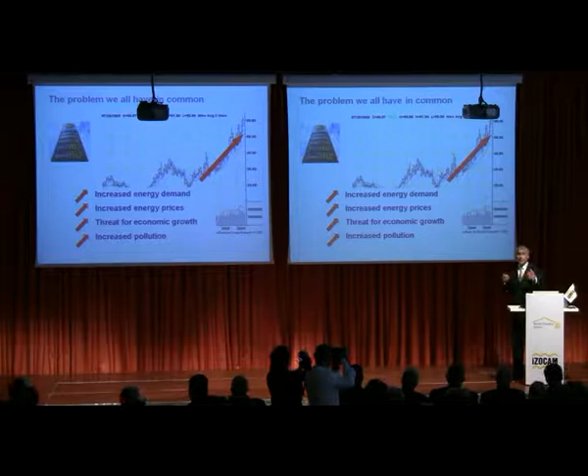The problem we all have in common is the rising energy prices. Why are they rising? Of course, fossil energy becomes very, very short, and it affects us all in increased energy demand, increased energy prices. It's a threat to our economic growth, our employment rates, and it creates pollution. It's a global problem, and we try to face this problem globally and give an answer, and this multi-comfort house concept is one of the main answers, especially the European Union is focusing on it.

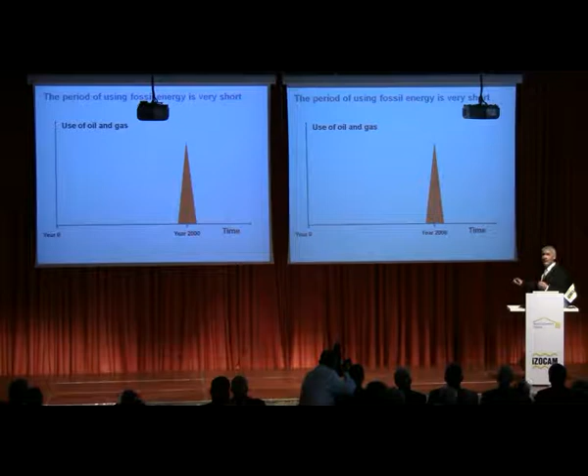Here you see this year zero and this triangle. This is around the year 2000. It's a very, very short period, and this is excessive use of oil and gas. This is the period where we invented the steam machine, a short period of the industrial age. Before that, we were using wind energy, solar energy, renewable energy. Now we can discuss how long we will still have oil and gas, fossil energy.

Did we already reach the peak? Of course we reached the peak - the peak of mining, but also the peak of panic. There is no doubt we will not find enough oil and will not have it forever. It's only a question of how long we will have it - 30 years, 50 years - but still our demand is growing.

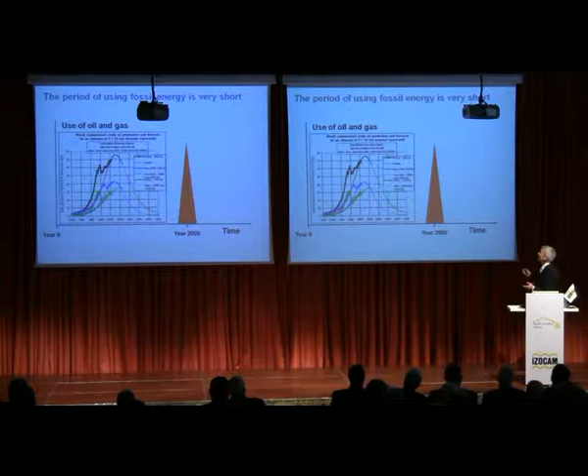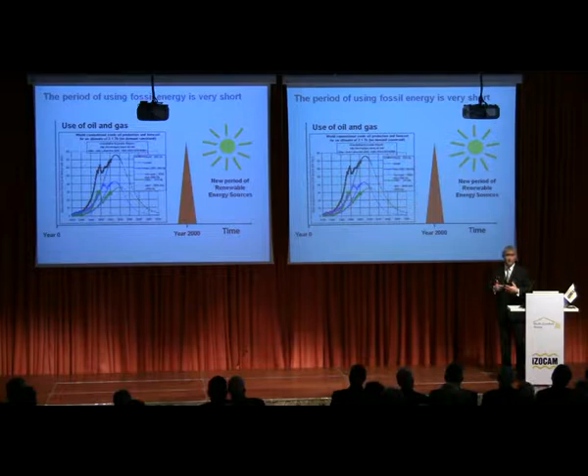So it is a fact and reality, we will not have it. And when we look at the traffic today, we neglect this effect. But it's true, we have to come back to a new era of renewable energy, as we had before. This is the biggest challenge we are facing because it's economic, it's social - all our behavior worldwide with our resources - to transmit and to come to our sustainable development.

That means business as usual, closing our eyes and just continuing as if nothing will happen, is impossible. We cannot every week open a new coal mine in China or whatever and pollute our earth. This is not possible. But what's today already possible - and you're architects, designers, investors, you are in the business of buildings. We need our homes. It's a very fundamental need. We need comfort, and in this area especially, we have the biggest chance to use energy efficiency.

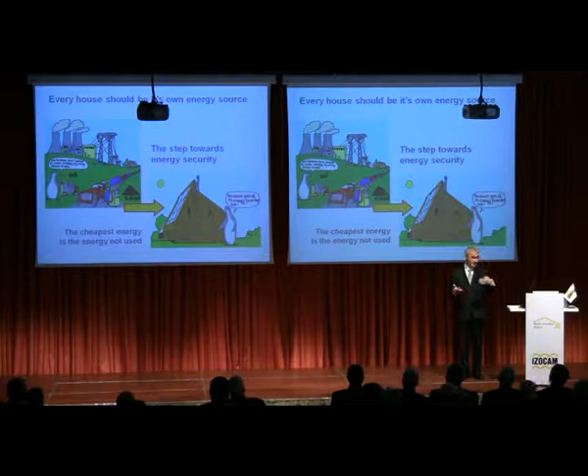So what's possible today? Today it's already possible to make buildings very compact. All our buildings are more or less compact, so it's not a limit on creativity in architecture. Then, of course, to turn it to the south, with the main windows, which we're already doing. In southern areas, of course, we need some outside shading, but in winter we take profit of the solar gains. We build it without thermal bridges.

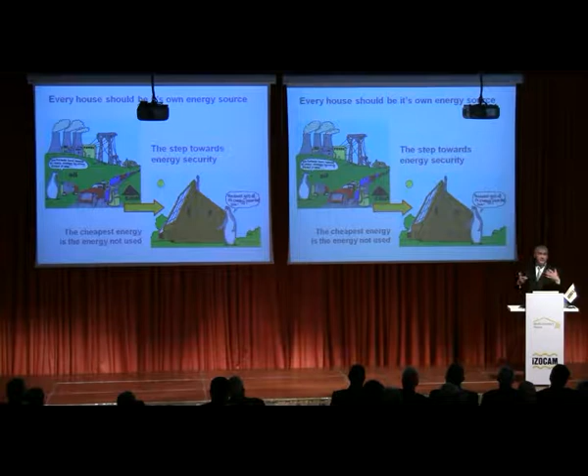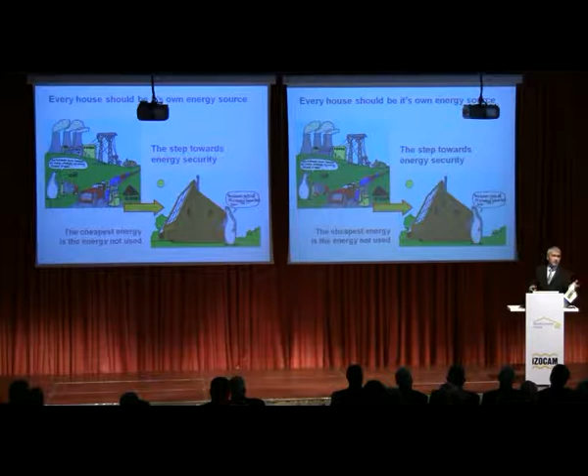And we heat it with our own bodies. It is passive - no active heating, just maybe a little help to tune the comfort, but not just to heat because there's no insulation, just to heat because there are single glazing windows, just to heat because there are leakages and the building envelope is not airtight. So this is a very, very simple concept. We could have already done it 50 years ago because it's low tech, we can touch it. In every computer, in every handy device, there's more technology than in just a simple passive or multi-comfort house.

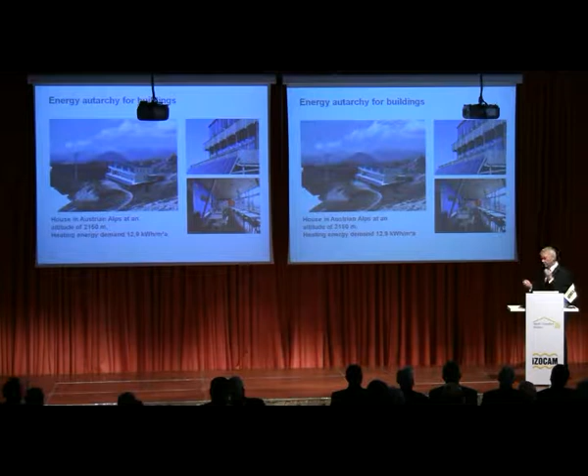We must do it. The European Union committed that by 2020 we should build only nearly zero energy buildings. So politicians are aware of this problem. Why are they so aware of it?

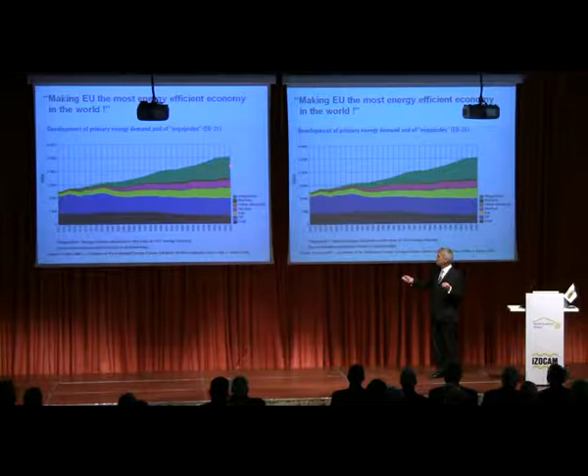Here you see the energy consumption in the European Union. In blue, for example, that's oil. In green, this is the energy not used, the energy already saved. So energy efficiency, and you see energy efficiency is the biggest source, already bigger than the oil used. Energy efficiency is the biggest source and the biggest chance.

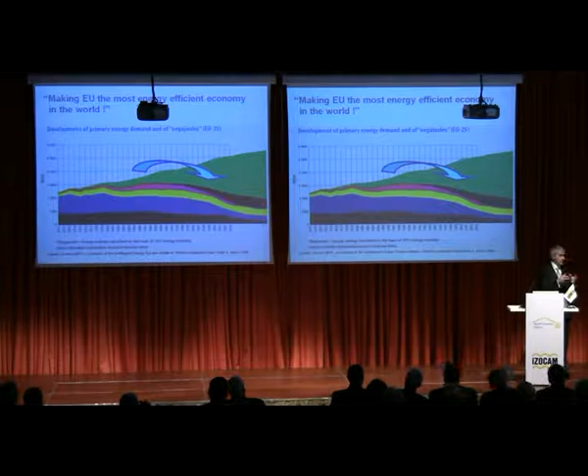But still, our consumption in energy is increasing. What we need is a dramatic turnaround, to minimize our fossil energy consumption and in the future replace it with solar energy, hydrothermic, wind energy, whatever. Which is not so easy because we cannot store it. But the better we are in energy efficiency, the easier it will be to solve this complexity of renewable energy.

Where do we use this energy in Europe? 28% industry, transport 32%, and buildings 40%. Energy is already very expensive, so it's an economic factor. Industry tries to reduce energy as much as possible, and we are happy that in Europe we still have some industry production, that we have workplaces. So the potential for the future here is limited.

Now, when we go to transport, individual transport, everyone likes to have a car. We live longer, even pensioners have longer drives, a second car in the family. Politically, it's very, very difficult to reduce this freedom of individual traffic — the traffic jam, some privacy, listening to the radio. So we are crazy, we know, but it's not so easy to reduce here.

But in the building sector, it is possible: 70%, 80%, 90% — it depends on the study, on the country, on the climatic zone. But not 5%, 10%, no. 70 or 80% we can save with one measure, with one investment. We do it once for the lifetime of the building.

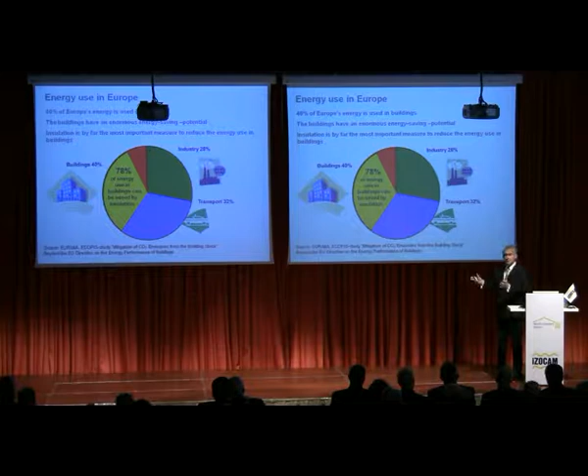Now, of course, you may say, my customer, okay, it's the global picture, it's the European Union. What is my personal benefit? What about my single house or my single apartment?

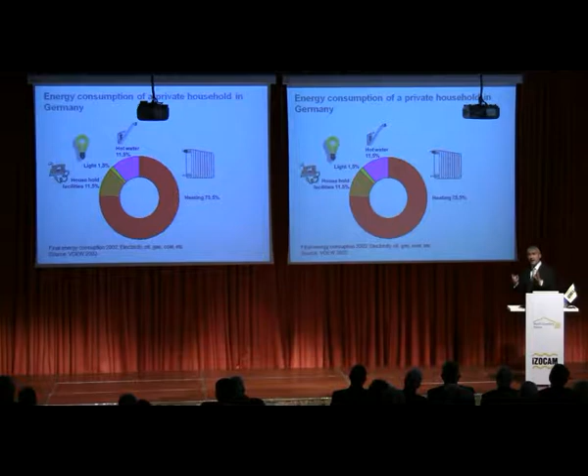We see that hot water is 11.5% of our use, household facilities also 11-12%, light only 1.3%. So it's nice when the teacher in school tells the children, change your lamps to low energy lamps — it's okay from the pedagogic point of view. But people think, okay, I changed the lamps, I did all I could do to save the world's energy. This is misleading. The biggest potential we have is the heating.

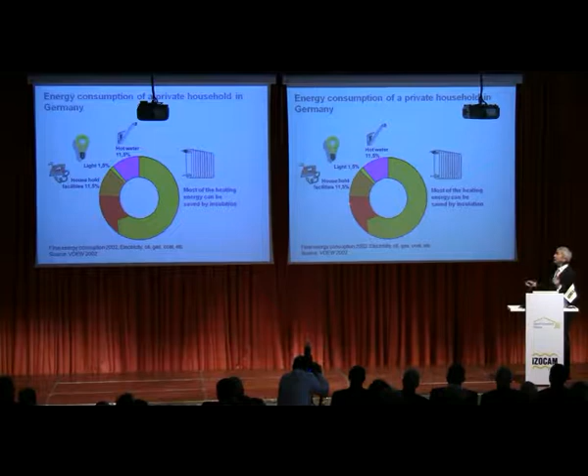And when we go to passive house level, or even further, you see for heating or for cooling we need no more energy than for hot water. So we come into the range where, as we'll see with some passive houses, you have per year 200 euro energy bills. So for the energy supplier, it becomes too expensive to even write the invoice.

So it's not only an ecological, energy, or economic revolution, it's also a social revolution, because we come to a decentralized system where not one big company or state-owned entity has the power. It's a kind of democratization also in this area.

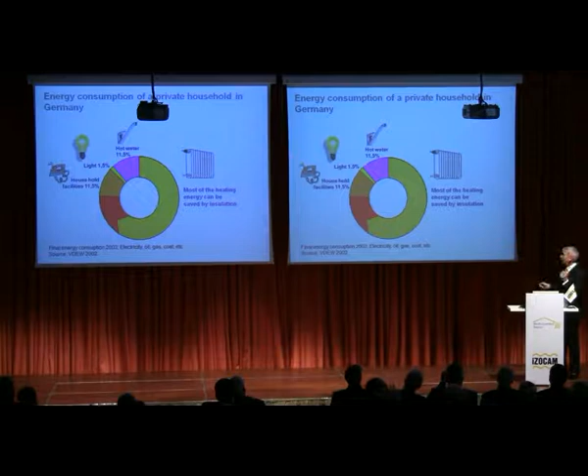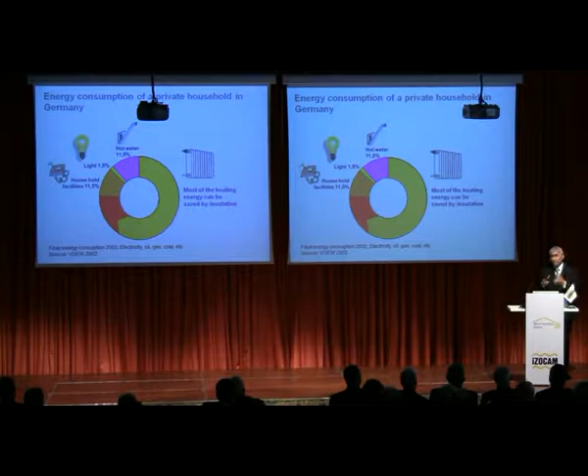So I have to wait for the next renovation cycle. If then the windows are old enough, the heating system old enough, then it's economically feasible to make a big change. So if you renovate, just wait, save money, and do it then at once, already perfectly to passive house level.

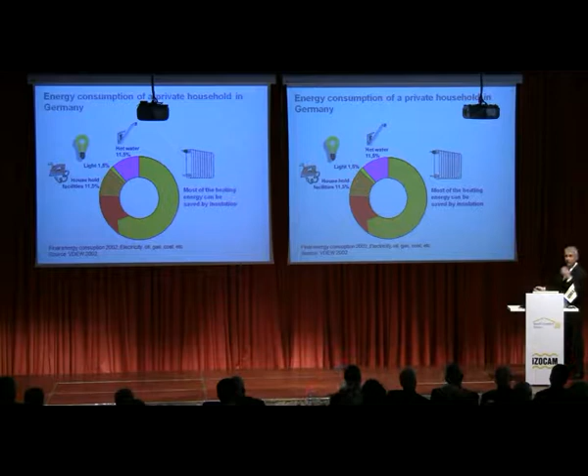You see, in the regulations, a lot of the building stock needs 300 kilowatt hours per square meter a year. 300 kilowatt hours per square meter is just to heat or cool 1 square meter — 30 liters of oil or 30 cubic meters of gas. It might be 10 times the volume of the room, or 10 times the volume of the building, which we heat every year.

And not only one house, and not only Istanbul, and not only New York — the whole world. So you see, the regulations historically came gradually toward an energy saving house, low energy house, passive house.

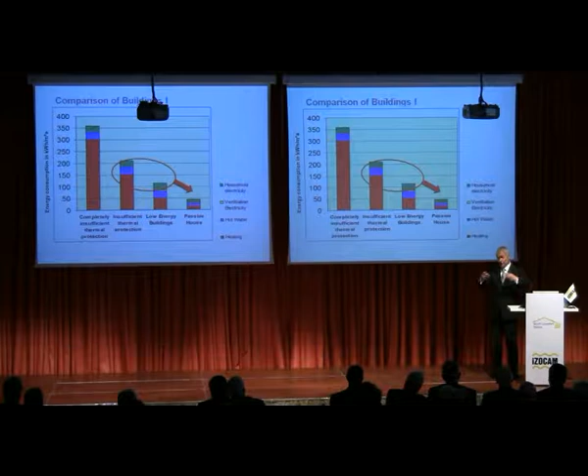But we don't stick to the regulation. The regulation is always the minimum requirement. What can we do as intelligent people thinking about the future, already with today's technology, go already to the best level? You will see from the presentation of architect Ingrid Meisinger that it's today's technology, it's simple technology. 40 years ago we flew to the moon, we could have already had passive houses 40 years ago.

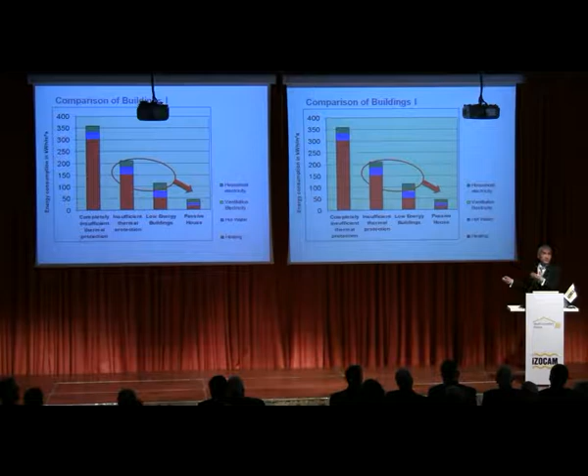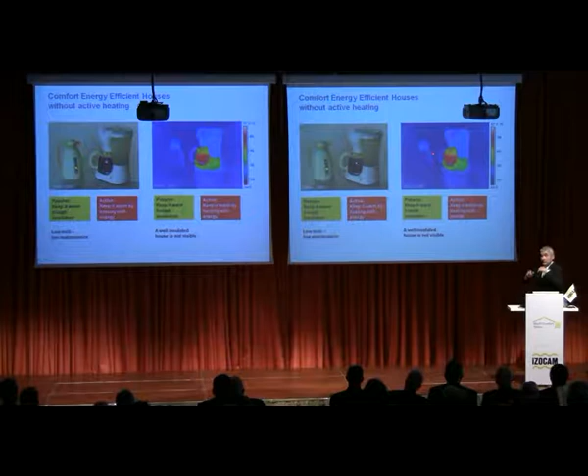So with this little energy consumption, renewable energy fits very well, they can work together. The principle is simple: we're not heating the environment, it's well insulated, we put an anorak on our building, keep it warm, and the little energy we need, we produce ourselves.

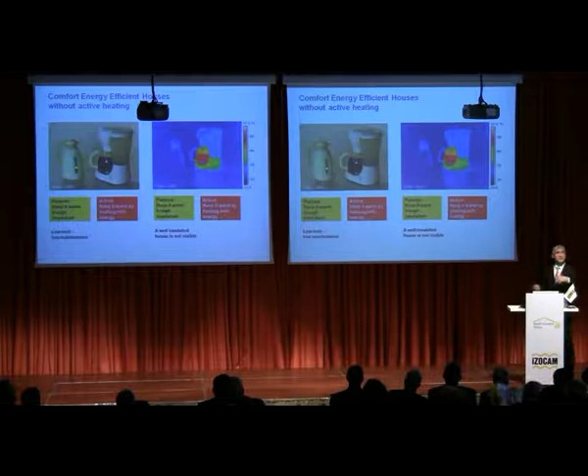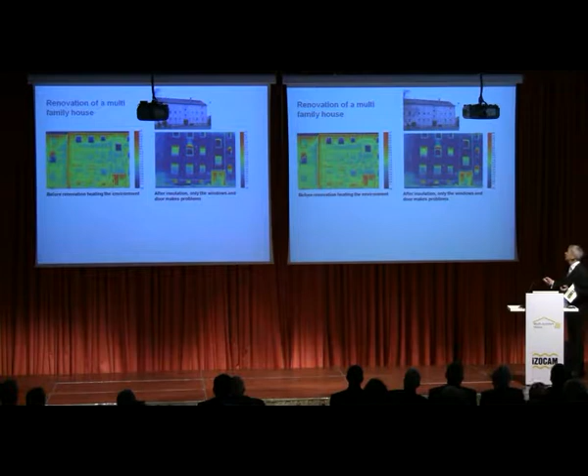A passive house, or energy efficient house, active house, whatever, it's not only about the names. A passive house or multi-comfort house, in thermographic imaging we will not see thermal bridges. In today's houses, we are heating the environment - you cannot say here is a thermal bridge or there, the whole building is a thermal bridge. After renovation it's still not perfect, you see some weak points, but the concept is clear where we have to go.

I always said it's simple. What are the main elements? I'm sure you already know, and the students from the contest put it in an excellent way - look at the presentations, how to do it. First is compact building form, not to have cooling ribs or protrusions. Have excellent insulation, U-value, without thermal bridges, have it airtight, have triple glazing windows. These are self-evident elements, nothing new, nothing exotic.

For hygienic reasons, we have to open the window every 2 hours. In summer, spring, autumn it's not a problem, but in winter the warm air we preserve has to be ventilated out, and fresh cool air comes in - a lot of energy goes out. A better solution is to have a controlled ventilation system with a heat exchanger to preheat the fresh air coming in.

This is one obstacle for people - can I open the window or not? It's a dramatic discussion with some mystic fears. I say to people: when you drive your car, you put on your ventilation system, there's always fresh air. No one turns off the ventilation system while driving saying 'I get tired, let me open it and close it again.' But people say, no, I don't want the ventilation system, so they have to open a window all the time.

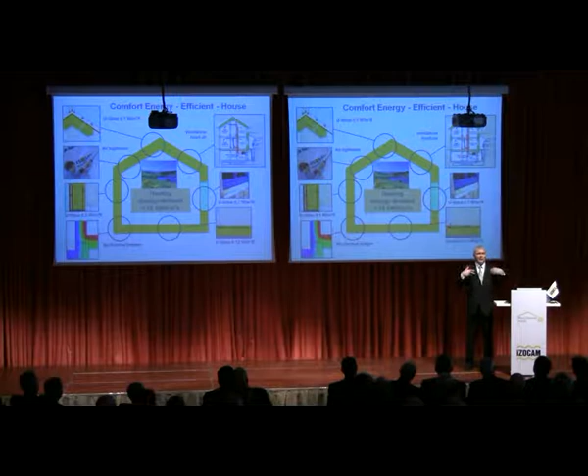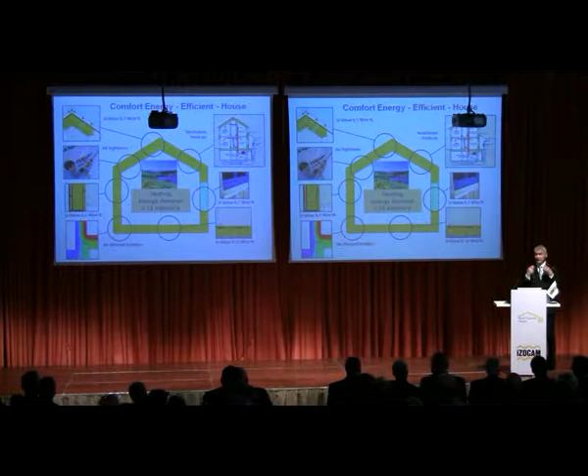If they don't open the window, they have dramatically bad air with a high concentration of CO2. We see this especially in schools - children cannot concentrate. At night we cannot recover from day stress, we cannot sleep. So this ventilation system is there to keep the temperature, but also to have filtered air without mosquitoes, night ventilation, and always fresh air with low CO2 content. The temperature I feel, I don't need a thermometer, but the CO2 content I don't feel - we have no sensors for that, so we get tired. We need this fresh air.

We can put the fresh air intake in the ground, pre-cool in summer, preheat in winter - all combinations to keep the temperature comfortable. We have to emphasize coolness more, because in passive houses we have enough energy to keep warm, but keeping it cool in summer might be more difficult. If people pay 50 euros more than calculated a year, no one cares, but if it starts to be hot, that's a problem. So if you're an architect making your first passive house, the most important thing is outside shading and pre-cooling, because it's directly linked to personal comfort.

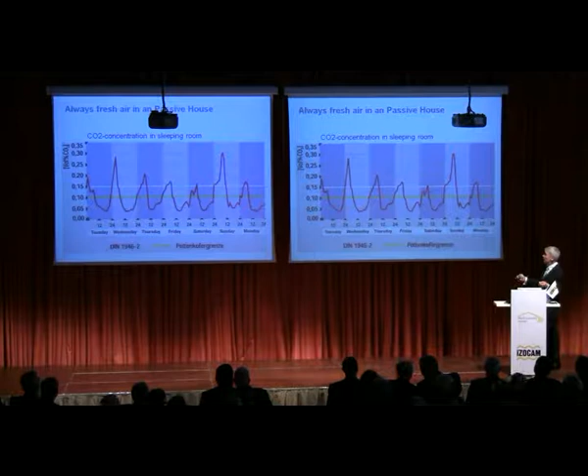Here you see a sleeping room in Germany. During the week - Wednesday, Thursday, Friday night - the CO2 concentration goes very high. On the weekend even higher, because they have more activities in the sleeping room. But with the ventilation system, they always have fresh air, so they stay within the hygienic range of this comfort 1000 ppm.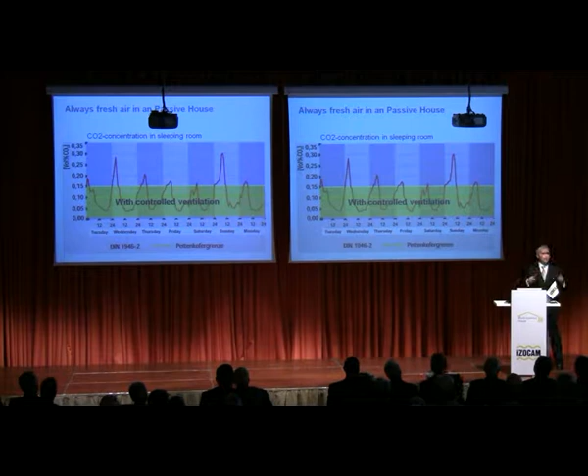I will show in my second presentation a measurement of CO2 from my passive house apartment. This is an old house with no protection, needing a lot of energy to keep warm. This is according to minimum standards. This is an energy-saving house, and here is a passive house - compact building form, well insulated, no thermal bridges, minimum energy consumption. The benefit: 30 liters of oil or 30 cubic meters of gas per square meter, versus only 1.5 - a big difference, a big dimension.

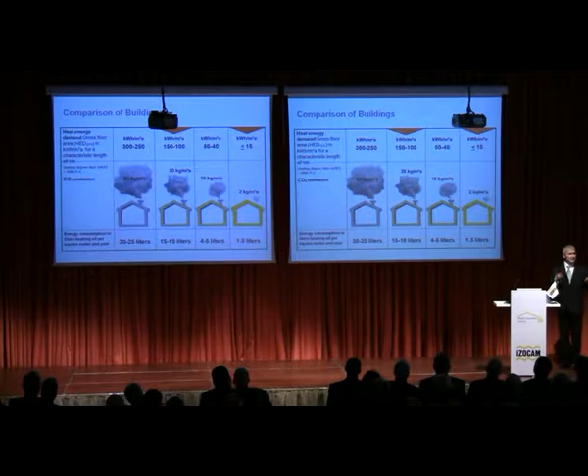Now let's scan such a passive house and see what's behind. This is maybe a normal house with 150 kilowatt hours per square meter per year, 15 cubic meters of gas.

We have the transmission losses in blue, so the energy passes through the walls, the windows. And we need fresh air. We have energy losses by opening the windows, by the ventilation.

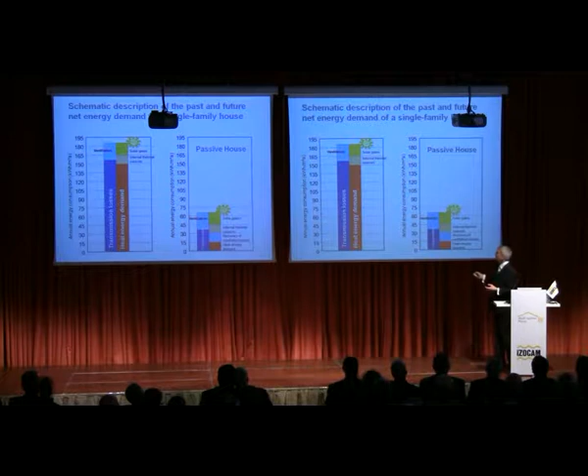Then we have the passive solar gain through the windows, south orientation. We have internal sources - you are heating now this space, this hall, everyone around 80 watts. And the difference, the delta, normally we are used to heat, because oil and gas was very cheap.

In a passive house or multi-comfort house, we just put the anorak on the building - once put on the insulation, once put on the triple glazing, outside shading - and still we need fresh air.

We have the same solar gains, we have the same internal sources, but with the ventilation system and heat recovery, we take a lot of energy out of the warm air going out, so that we just have a little demand for heating and cooling.

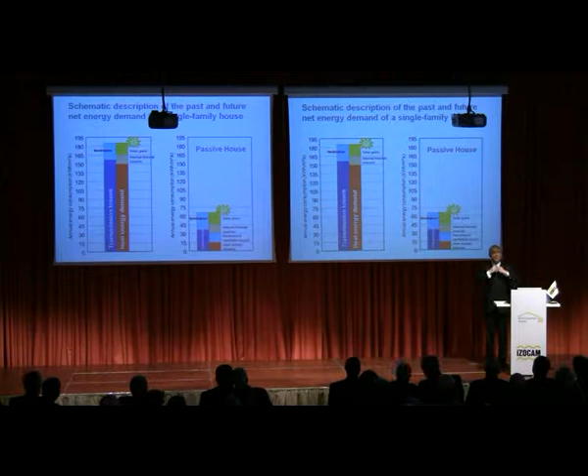Just to tune - oh, I want to have 23 degrees, 22 degrees, 24, 21 degrees - just to tune the comfort, but not to heat to compensate for bad planning or construction mistakes.

Okay, and you see the benefit also in CO2 and oil or gas consumption. So we make our national economies free of oil and gas imports.

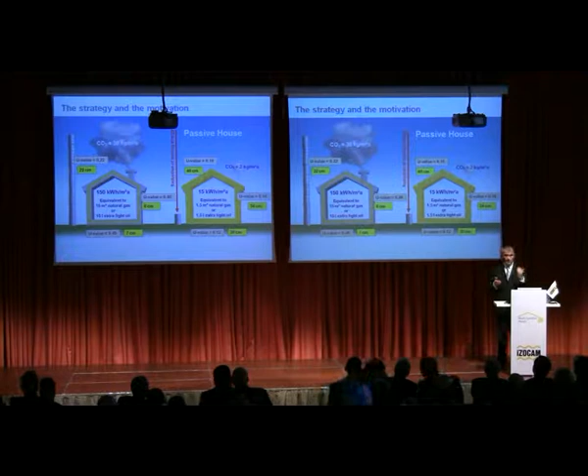So more money remains in the country for schools, for education, for pensions, for elderly people, for renewable sources, rather than fighting for the last drop of oil in the desert sand. So it's a win-win situation for everyone.

Very often we blame the politicians - the higher the level, the more abstract they are acting. But we have seen this situation in Europe that there is no way, we cannot import. From whom should we import oil or gas in 20 years? So Europe has to become energy independent.

And the politicians say we have to decouple, disconnect the energy consumption from our national economies. But we have learned - okay, use more material, consume more, then economic growth means welfare.

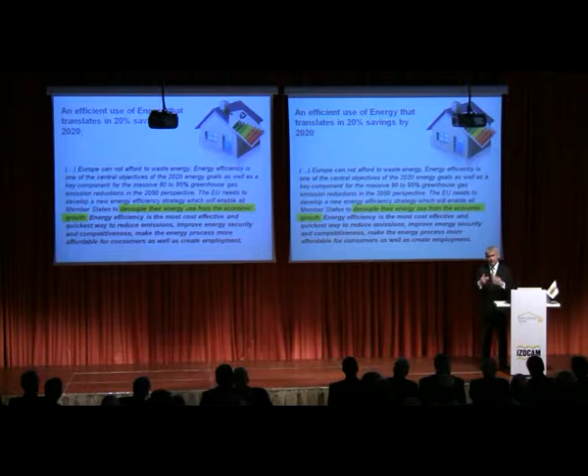We have to learn that we can have quality growth, using less energy, using less resources, but having more comfort, more social welfare. This is the task for the future we have.

EPBD is regulations. Now the European Union says also that by 2020 the member states should only build nearly zero energy buildings. This is a sensation.

This is excellent, because we can say the Kyoto Protocol - we did not really reach it - and then also climate conferences, Copenhagen, just a little paper but no actions. Here there is an action.

Politicians say, okay, this is a level, but we are not allowed to make a mistake now, to say, okay, it will not be so strict, how can we avoid it? No, it's a clear target, it's a challenge, and it helps us to protect. This is excellent, and we should not weaken this concept.

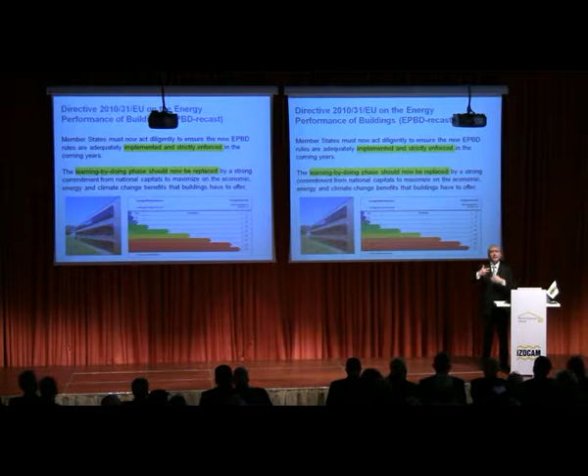It's a chance for every architect to create special know-how, to be USP, and it's for all builders and the comfort for the private person.

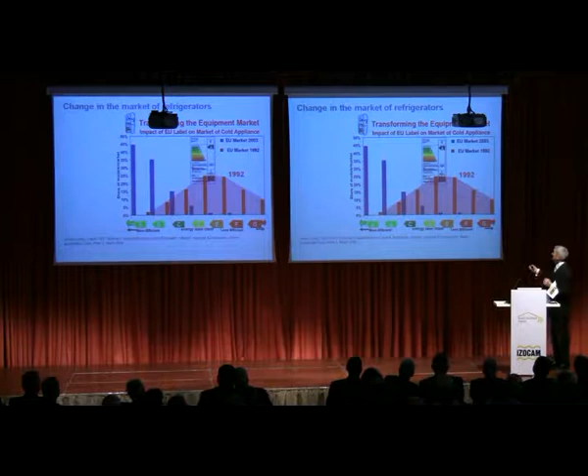How quickly it will change - General Manager Nouri also showed you the way from D to C class or going up. This is, for example, refrigerators in the year 1992.

So people bought D or E class refrigerators because they didn't know what the electricity consumption was for their fridge. But with this labeling, people said, oh, there is something better. Look, I can compare - for the same money, I get A class now.

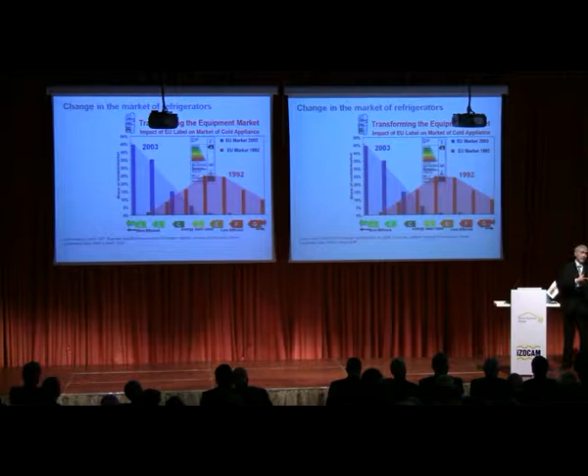And you see, in 10 years, you can only sell A or B class refrigerators. That means for an architect, okay, today you can build D or C class, but in 10 years it will be impossible also for investors to sell, because - oh no, okay, today I can afford it, but when I'm older or in pension, I cannot pay, it's too expensive. So it changes the whole market of real estate.

Okay, so just one simple renovation example - an old bungalow from the 1960s or 70s. Everyone was proud to have a big tank of gas oil. Look, I am energy independent. I was very proud.

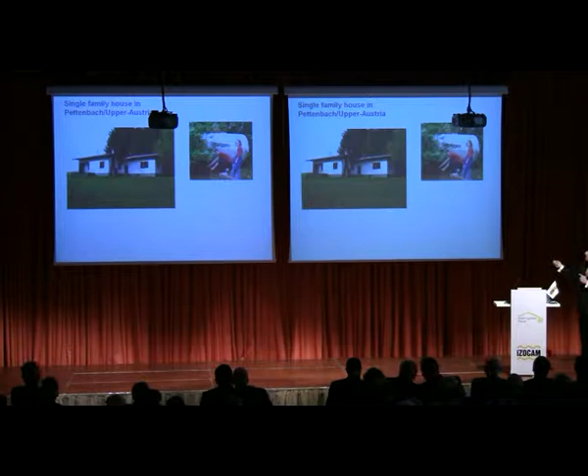Today, they would be proud to have some solar panels and not depend on gas or oil. In a passive house, we don't need a conventional heating system, so we can save money and we don't need a chimney.

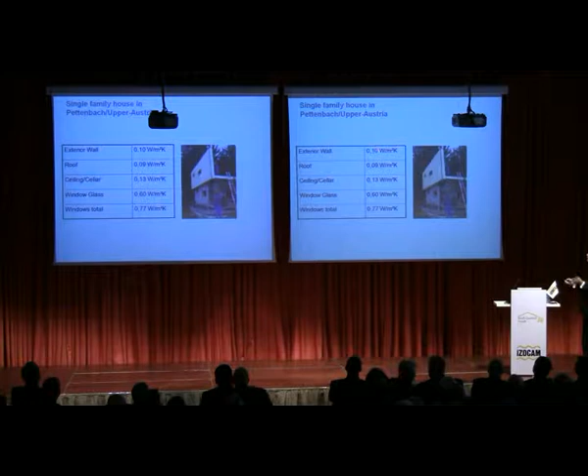The family said, okay, we need more space, we want to live more modern. So with an architect they changed the functionality of the house, using prefabricated elements. The outer wall has a 0.1 U value, the roof 0.09, all in that range.

In the morning when the neighbors passed, they thought, okay, it's this ugly ruin, but when they come back in the evening, they say, oh, I missed the way because it's a wonderful, nice house. It was not the cheapest solution, it was also a research project, but we see compact building form, orientation to the south, outside shading lamellas, and we have also some photovoltaic elements.

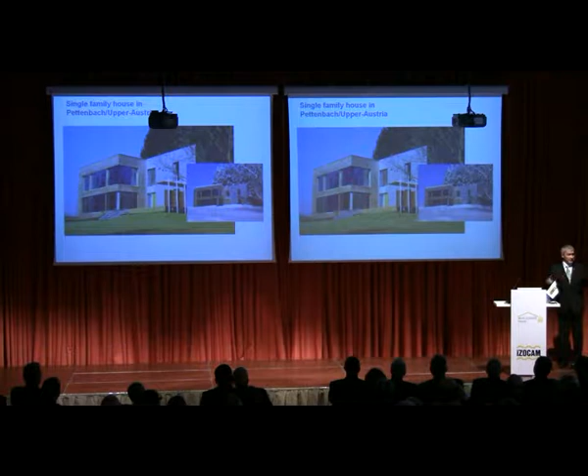Before renovation, 45 cubic meters of insulation material was used. After renovation, 125 cubic meters.

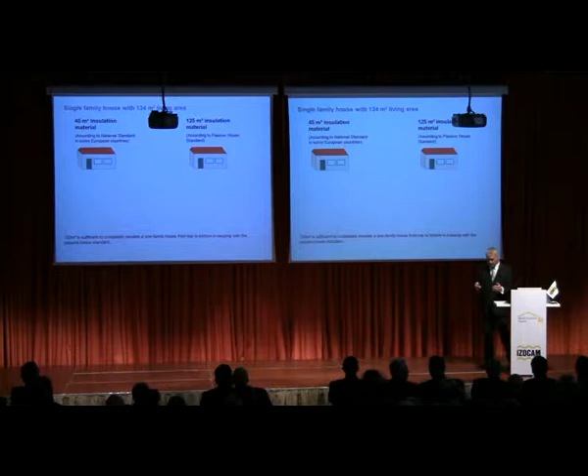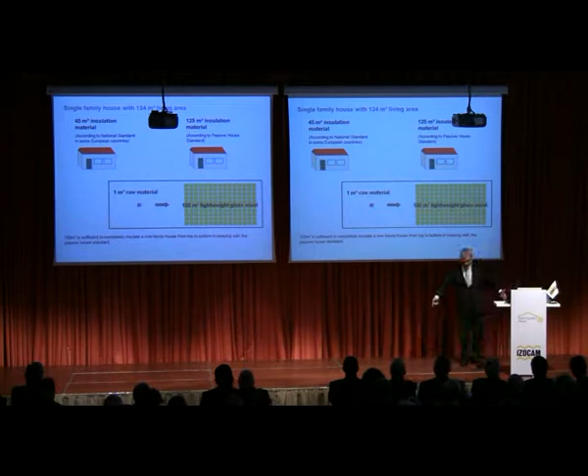Now, how ecological or sustainable is our mineral wool production, glass wool, stone wool production? Out of 1 cubic meter raw material, we make 150 cubic meters of lightweight glass wool. So out of 1 cubic meter recycled glass and sand, we can insulate more than this one family house. So also in production, this is very, very efficient.

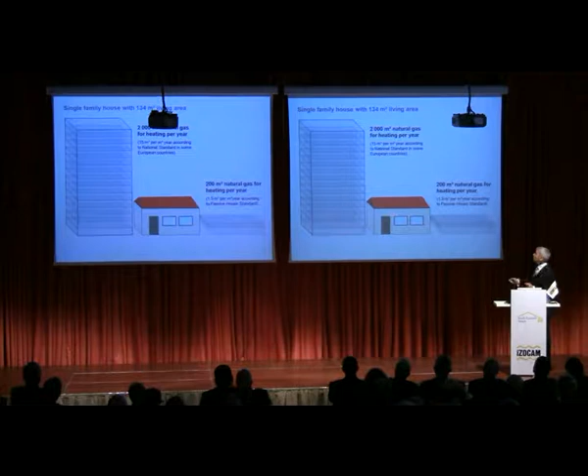This is the gas volume for this small house, heated and cooled in one year - before renovation, and this is after. So three times the volume of the building just to heat. This is the catastrophe we have everywhere, and this is now responsible for climate change.

Before, to heat cost 2,700 euros for the whole building. Afterwards, and the building is even bigger, 200 square meters, only 200 euros. So that's 1 euro heating cost per square meter in the year. So if energy prices would double, it's not a problem.

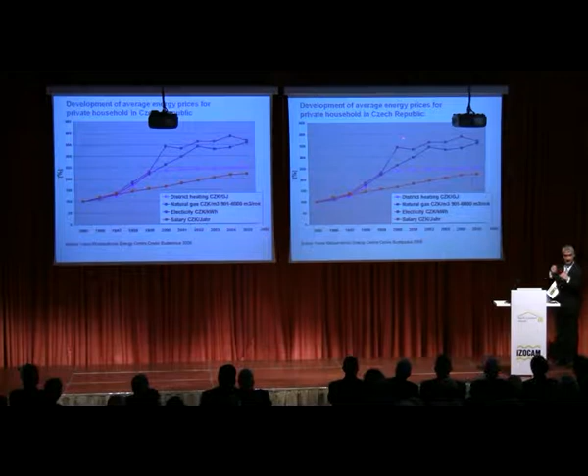This is an old slide, but I keep it because it's from the Czech Republic, and this is the evolution of the average income, what people earn. And here you see the evolution of the energy price. So the question is, when I'm old and in pension, can we still afford to have a nice warm home? So it is also an investment in our elderly becoming society.

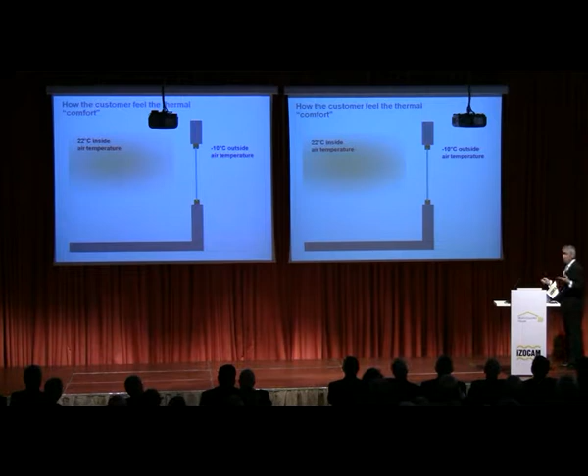Now, maybe this is one of the simplest slides, but the most important, because for me it's a question why it is so difficult to change this behavior. In Austria in the past we had just a wall without insulation, single glazing windows, maybe double glazing windows, but not so good. We want to have an inner temperature of 22 degrees with outside at minus 10 degrees.

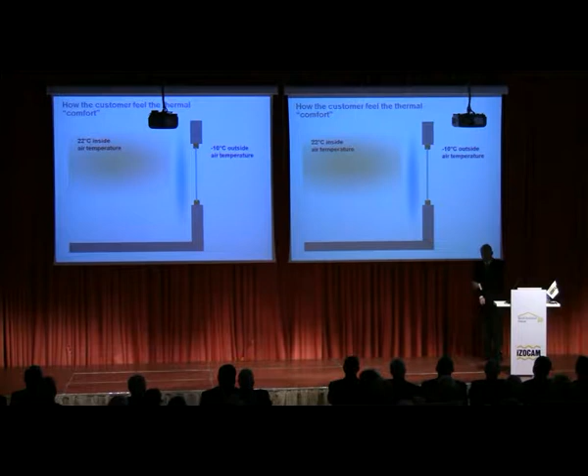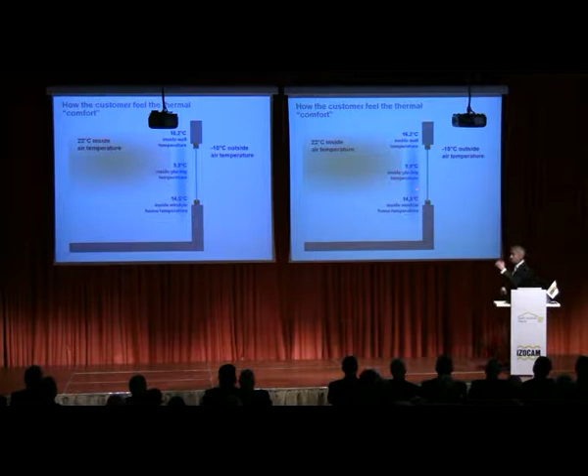So what we feel when we go to the window is, oh, there is a cold air draft coming down. It's not comfortable. Why? Because the surface temperature is too low. So there can be mold growth, condensation, and a lot of air circulation, so we don't feel comfortable. We feel the draft going down, and we have a cold lake of air. To compensate it, what we do is fix a heating system just to compensate.

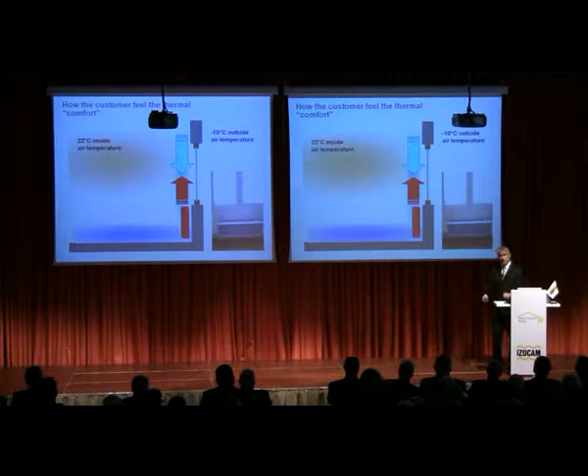So, one mistake: not insulated, only single glazing, not airtight. With permanent costs and pollution, we heat against it, but as you've seen before, in fact mostly we heat the environment. This is problematic. We have a radiator, it's hot, but still at the legs it's cold. There are no homogeneous conditions.

This is a problem. The solution is very, very simple: just triple glazing without thermal bridges and insulation outside - not 5 centimeters, 10 centimeters, because the insulation itself does not cost much. The fixation and so on also does not cost much. So it's about workmanship, a rendering system.

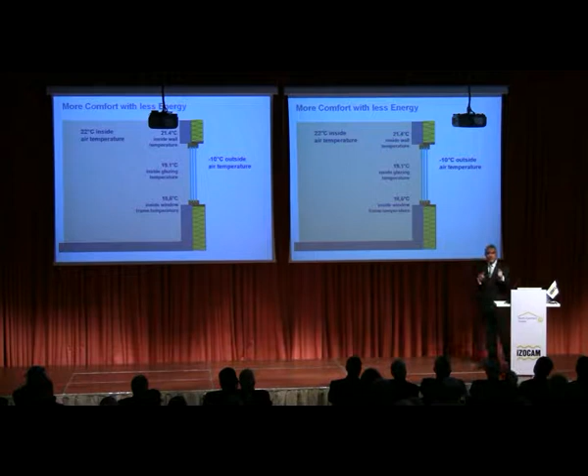This is not expensive, but the more I insulate, the more money I get back. But mentally, it's so difficult to make this little step and this change. People say, oh, I have a heavy old brick wall, for example, but no insulation - I don't want it to be too big, so they make it small, and it's a completely reversed situation. Even engineers say, okay, how should we fix 20-25 centimeters of insulation?

I will show you how I did it in my apartment, also from the inside. So this is the biggest obstacle, only emotional. But for us, it's normal.

We build pipelines through Asia, we have all these accidents and pollution, and we make war. This we learned, no one is asking what is my payback, what are the real costs. But here, it's so complicated - no, we don't know, don't exaggerate. We see what's happening, and then we pay.

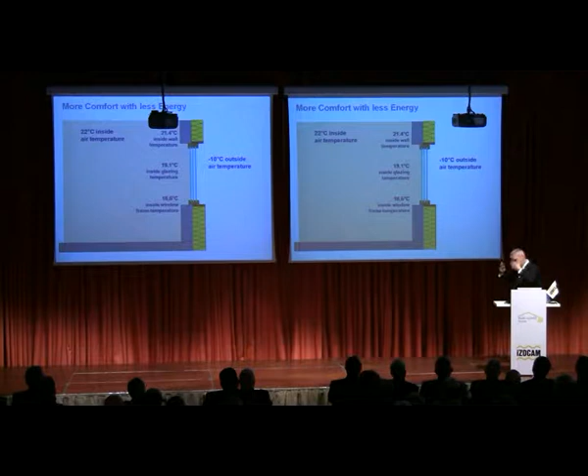That's why I say, first we have to build in our head, and then on the construction site it's very simple. There are solutions in massive, in lightweight, all is possible, for the roof, flat roof, pitched roof - nothing new.

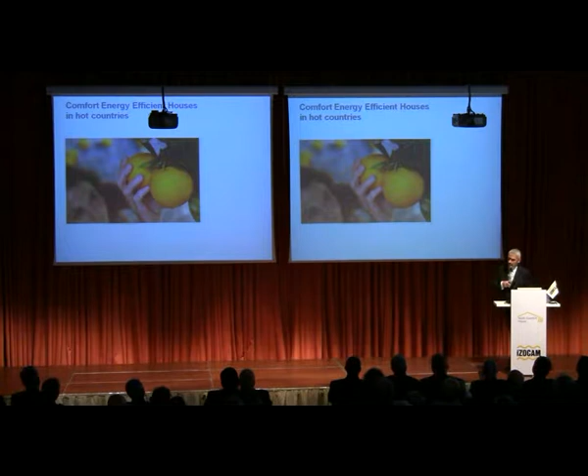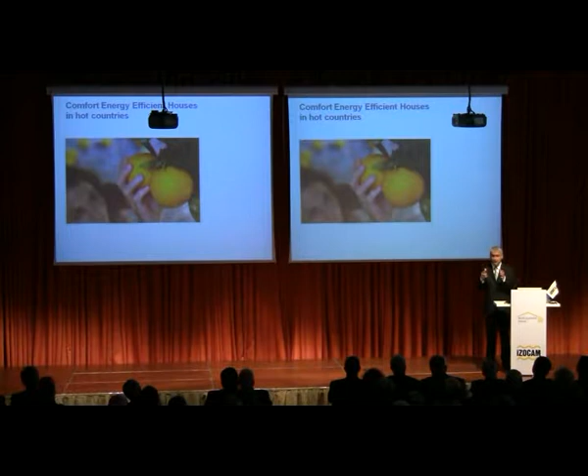So, just for the hot countries? But not only for hot countries - summers are becoming more hot also in Vienna, not only for 3 days, then for 2 weeks or 1 month, so the temperature never goes down. We have a lot of concrete also in the city of Vienna, so it's an island of heat. The temperature is 2 degrees higher than in the Vienna woods. So night ventilation doesn't work, because during the day it's too much heat, and in the night the temperature doesn't go below 20 degrees.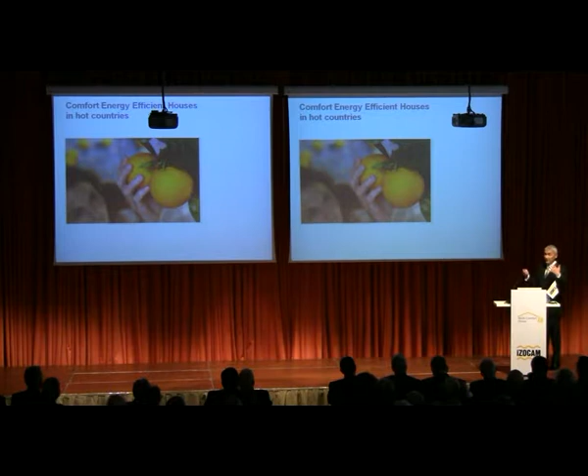So what we can do also to have, especially in summer, a nice indoor climate - this is not the solution and not the way of architecture, just to force in this electricity energy-consuming system. This is a facade of the Energy Research Institute in Shanghai, so whenever they have a comfort problem, they put one more of these systems.

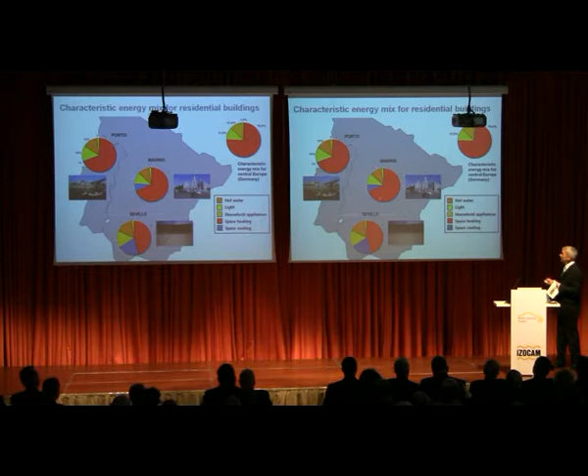I have no simulations for Turkey, but I made some years ago with Passivhaus Institute, with Jürgen Schnieders, for the Mediterranean area, some simulations. We could not get any data about energy consumption, what was real - no one knows what is heating, what is cooling. So we made some simulations, and we looked at Porto, we looked at Madrid, and for the hottest spot, Sevilla.

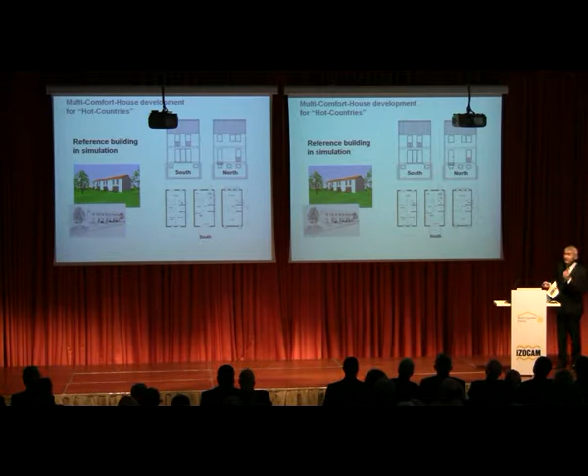So let's look at Sevilla. You see, red is heating demand, and blue is cooling demand - so even in Sevilla, the heating demand is much higher. The simulation was made with the end of a row house building, so it could stand everywhere - it's a normal representative building in this way. And here you see, without insulation, the blue is the ambient temperature outside. It goes far over 30 degrees, and also inside it's much too hot, hardly going down to an agreeable level of 22, 23, or 24 degrees.

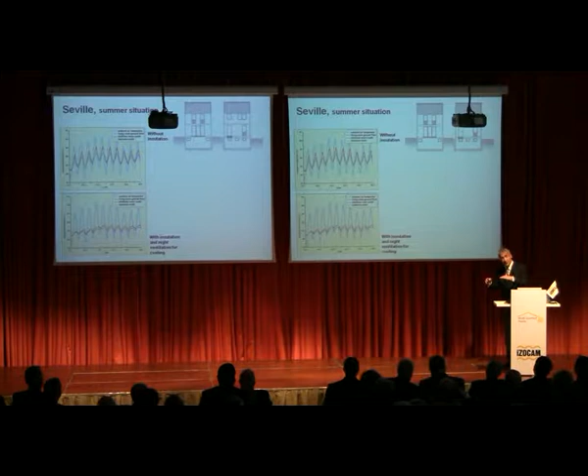If we look with insulation, you see outside temperature still very high, but with outside shading during the day and night cooling, night ventilation, we can smoothen it. But of course in Sevilla it accumulates, so it becomes too hot - too warm inside. Of course in Sevilla we would need some cooling to smoothen it, but just a little, not like here. So especially in hot countries, this airtight passive house concept has a big advantage.

So I think I have to be a little quicker. Just go here to the costs, because yes, it's nice, it's good, but no one will pay - it's too expensive. So give me 5 minutes more just to look at the economic point of view.

As better the building is in energy efficiency, the higher the investment costs. If I go to a zero energy building, of course it becomes very hard. But when I go to a passive house, to 15 kilowatt hours per square meter a year, then I don't need a heating system - I save a lot of money, I go down, so it becomes cheaper. Then I have less running heating costs - as better the building, the less running heating costs. If I sum up, I add those two costs, I come to a picture of total costs, capitalized costs, like this.

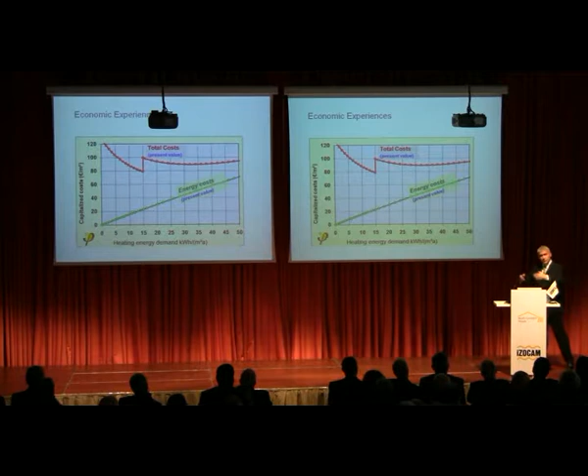Yes, because it's very flat, and the energy prices will rise, or we will not have energy. So here, for the same money, I'm on the safe side for the future. My house for the children later still has the value, still has low energy cost. If I'm in pension with a small pension, I still can afford it - this is most important. The other way is, I have here the time scale and here's the money.

These are my investment costs for every house. Now, I add the heating cost, for example. I could add some additional system, but unfortunately something happened there. I have additional cost for the passive house, and lower running heating cost, you see? So less investment cost, high heating cost. High investment cost, lower heating cost. It's more or less the same.

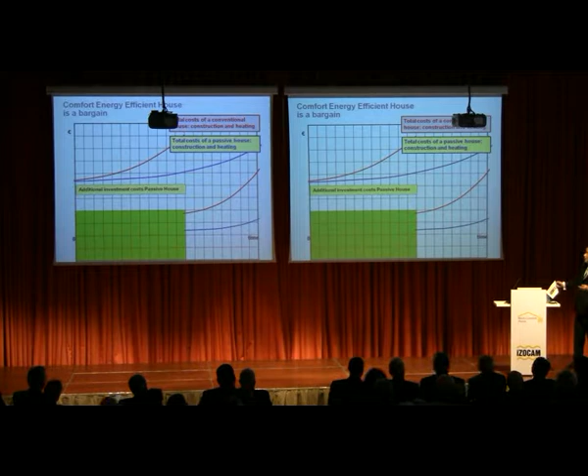So important for people is: what is my monthly salary? What can I take on credit and pay back? This is important. What's not important is what happens later, after 20 years, when I've paid it all back, whether with a normal house I have high energy costs or low energy costs. It's not important if I pay one year more or less, because it's very cheap. Sorry, here it went down, it should be up, I don't know why, it's some electronics I cannot control.

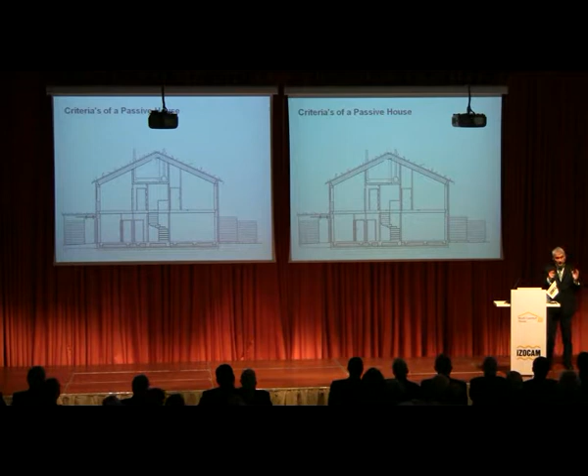It's more complicated than a passive house, as I told you. Okay, another way to consider it, to summarize - Nuri Bulut already showed this slide. I have a low energy house, and what is the additional cost to make it a passive house? It becomes expensive. Now let's reverse it: we have a nice passive house, and let's save money and make it just a low energy house.

Can we save money? First, in a passive house I said compact building form. When we make a low energy house, not compact, we don't save money - it costs even more. Then we have the insulation. Less insulation doesn't save money, because insulation brings me money. So to make a passive house into a low energy house, I save no money.

It costs money. Then I can go to the builder and say, please make it cheaper, build some thermal bridges inside. People say, no, I cannot build thermal bridges inside because I wrap the whole building with insulation material - it's simple, it's without thermal bridges. Then I say, okay, please make it not airtight. The builder says, if I don't make it airtight, I'll have condensation in the construction, I'll have damage, I will not do it. So you see, from passive house to low energy house, if we downgrade it, we cannot save money.

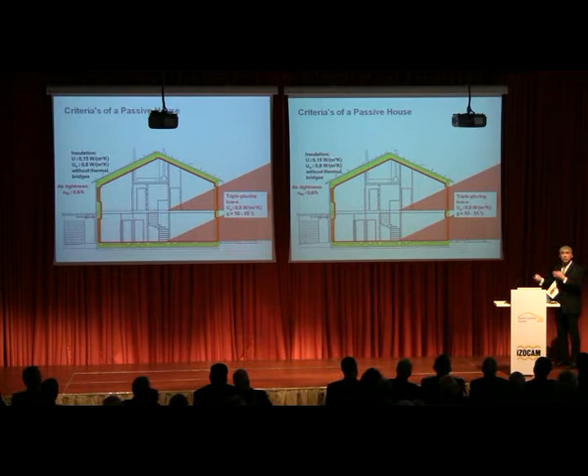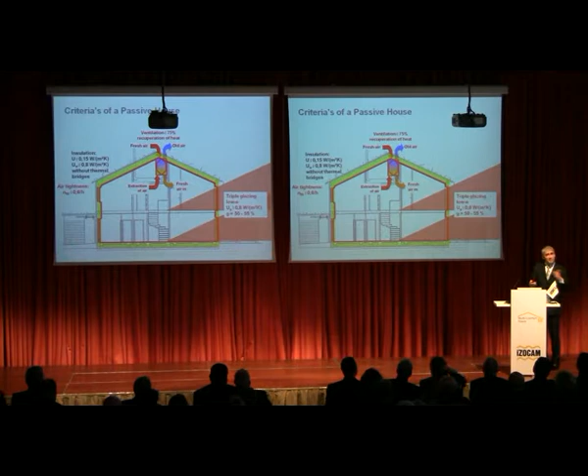Of course, then we can say, no orientation to the south - no, we will do it. Of course we have higher cost for triple glazing, but we don't need a heating system, we do it with a ventilation system. So to make a passive house into a low energy house, more or less, it's really the same cost.

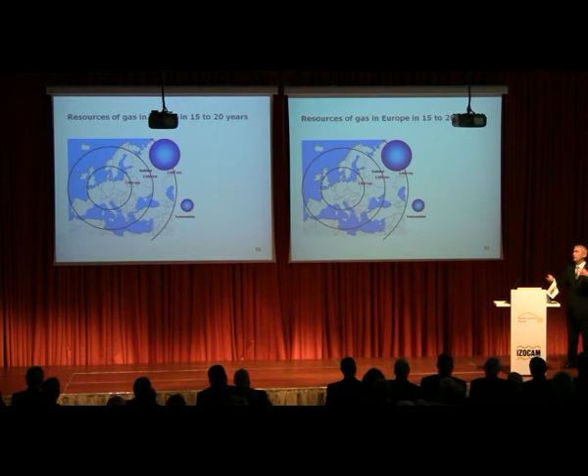Now to summarize, here you see the gas bubbles - these are gas sources we still have in Europe. Today, in 15 or 20 years, Europe will have no gas. We are 100% depending on outside sources. That's why the European Union says that by 2020 we have to be more or less independent with our own local sources. It's reality, not something that won't come. It's like saying we will have no cars here - no one is changing his behavior.

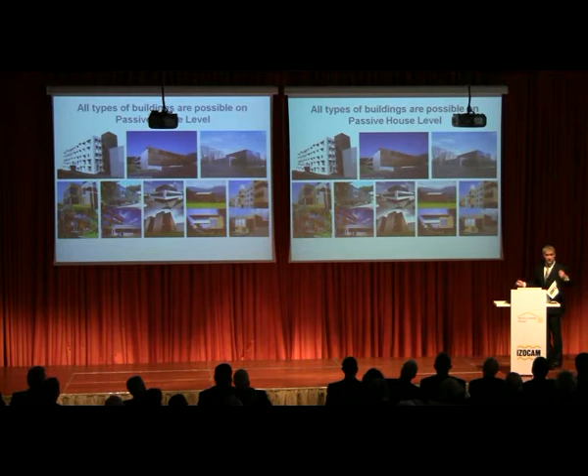Already today, 25% of all apartments are made at passive house level. So people say, oh, I can buy a passive house apartment? Why should I buy something worse? I can buy a refrigerator, A+ class - why should I buy a B or C class? The market has already changed. Even a lot of people say, oh no, I don't need all of that.

Sorry, it's 5 minutes too much, but thank you very much for your attention. I wanted to motivate you in this direction and to see what we have to face and how we can develop our common picture for the future. It's a big chance for builders, as you see - industry cannot manage it, traffic cannot manage it, but building, it's a very fundamental need to live in comfort. Thank you very much.

Thank you, Mr. Robert Shields.